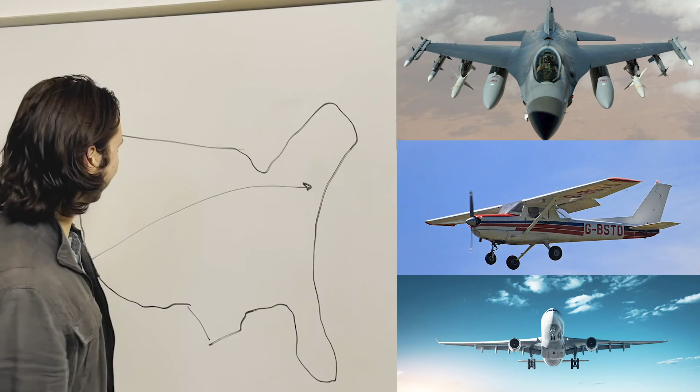So, what do aerospace engineers do? Well, they build rockets, they build satellites, rovers. One of their most phenomenal projects would be designing the airplane, which helps people travel really far distances, such as from LA to New York, across the entire US, fast. So now that we know what aerospace engineers make, let's look at how aerospace engineers think so that they can design planes, rockets, and all that good stuff.

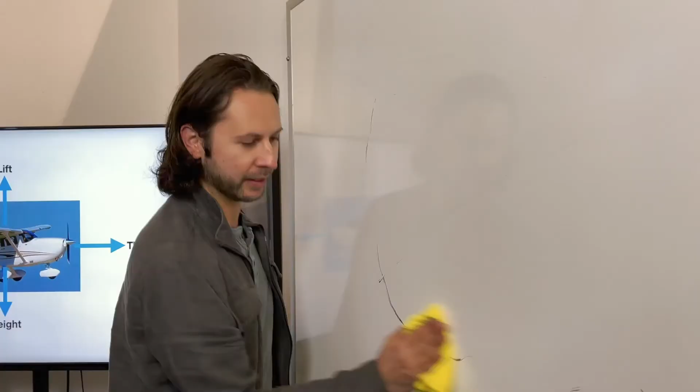As aerospace engineers make these planes, they have to keep in mind a lot of natural forces that they encounter when flying in the air. So we're gonna look into these forces, break them down together. There's 4 main forces that are acting on a plane at all times. The first force is one that we're all very familiar with, and that's gonna be the force from weight.

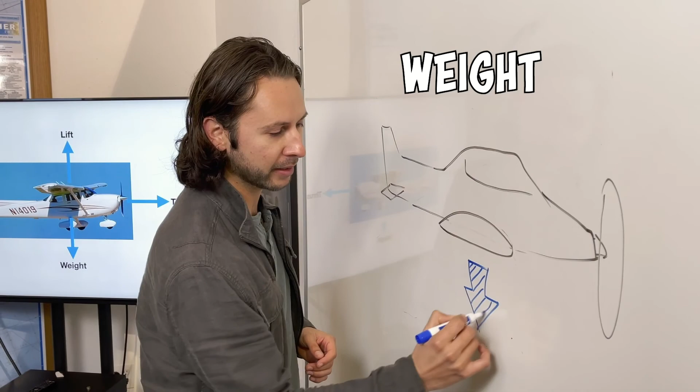Everything has weight. You have weight, I have weight, everything that we see has weight. And so what weight does is it keeps us on the ground. Weight also acts on airplanes.

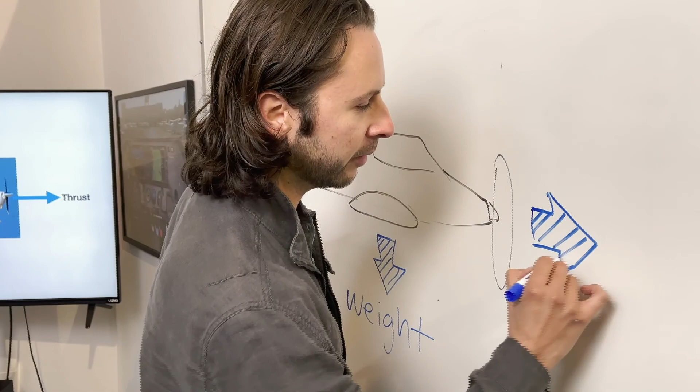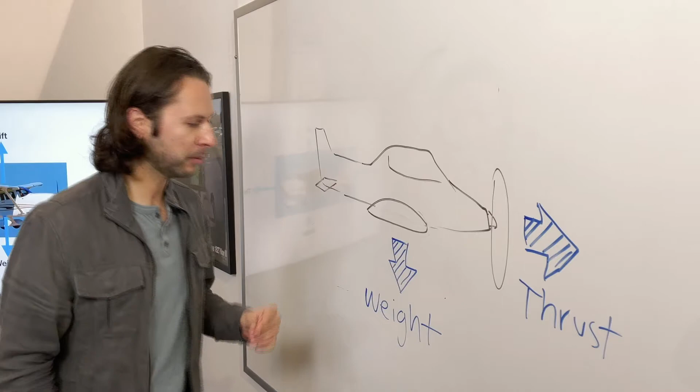Let's go into our second force, and that's going to be thrust. Thrust is what drives our plane forward, and it comes from our engine, our source of energy and motion. One thing to keep in mind is weight always exists, whereas with thrust, we have to actually apply energy and effort to get the plane to move forward.

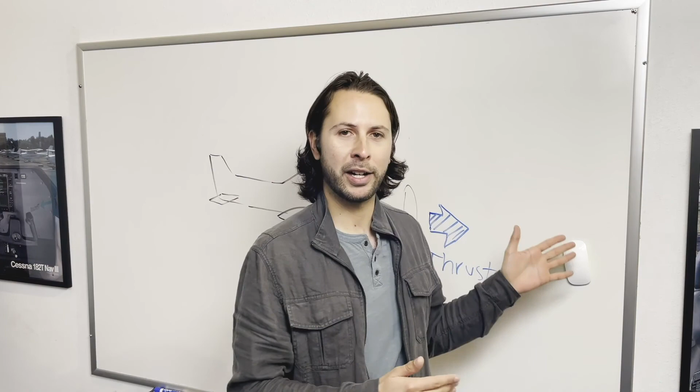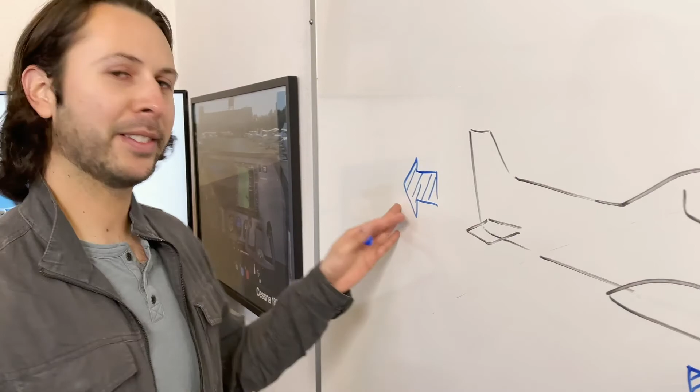Let's look at our third force, drag. Drag is something we're all very familiar with. For example, picture yourself in a moving car and you stick your hand out the window. You feel air resistance, which prevents your hand from going forward and actually pushes it back because it's resisting the motion of where you're trying to get to. If our motion is to the right, then our drag is going to be against that, going to the left. So drag exists back here. We're going to label that force.

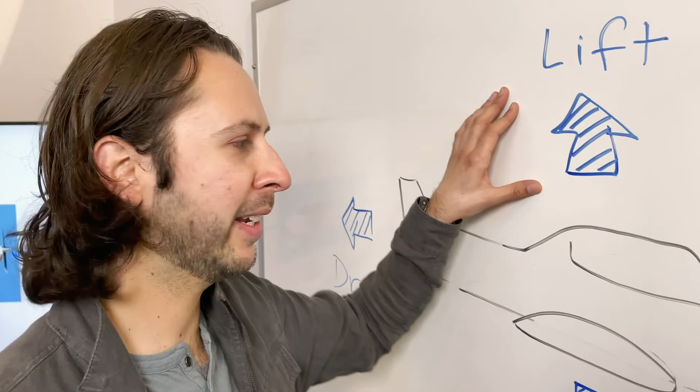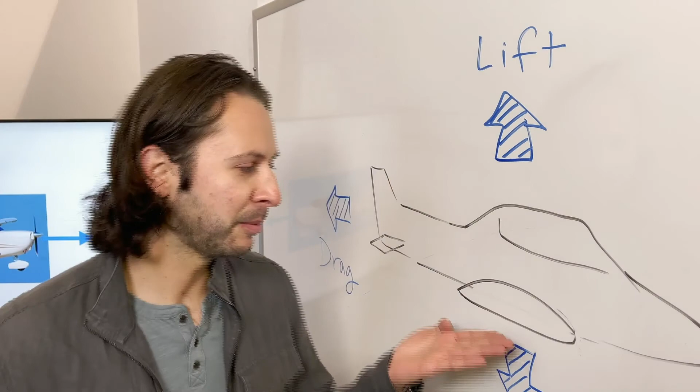For our fourth force, we're going to talk about lift. Lift is our fourth and final force, and it acts to get the plane off the ground. So ask yourself, what do all planes have in common? All planes have wings, and wings are shaped in a very specific way so that when the plane is moving at the right speed, they create lift.

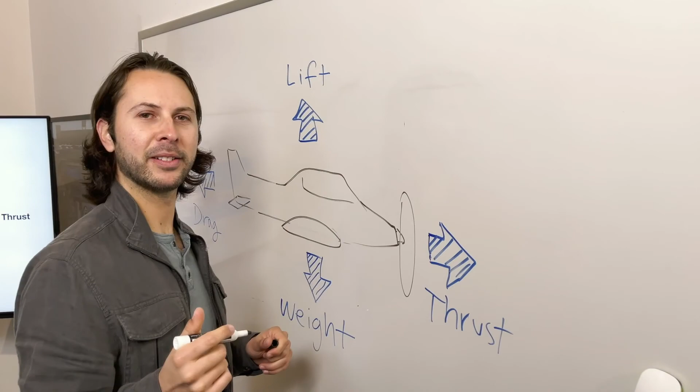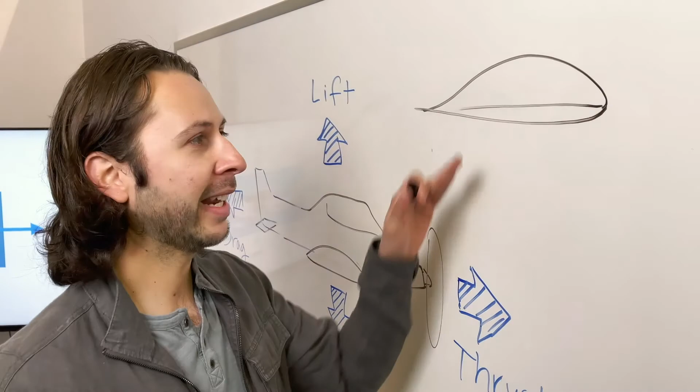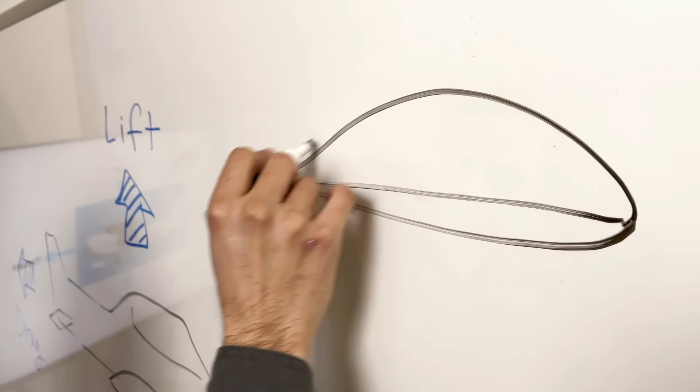Let's draw the basic shape of a wing. Looking at it from the side, we're going to draw the side of the wing, and this shape has a specific name — it's called an airfoil. If you draw a line down the middle, you'll notice that the top of the wing is a little bit more round, and the bottom of the wing is a lot more flat. This is the specific shape that gets us off the ground.

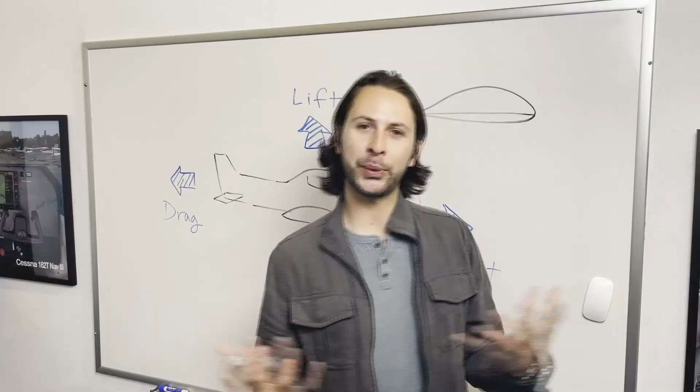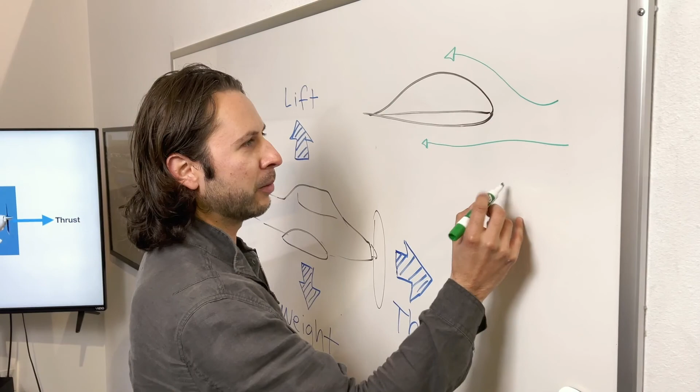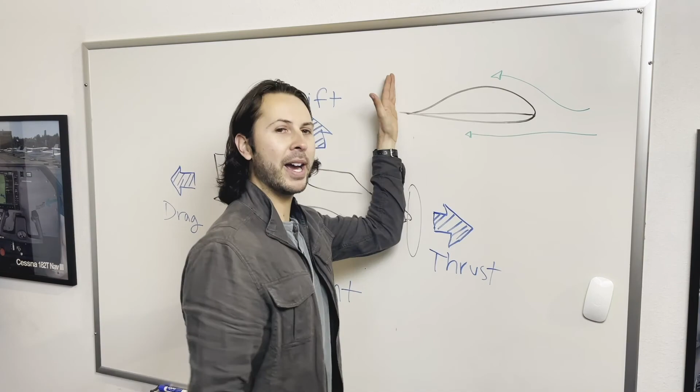Wings move through the air, so we have air passing above and underneath the wing — airflow above and underneath the wing. We have air molecules at the front of the wing that are traveling together, and they need to travel above and underneath the wing and meet at the back of the wing together as well. This happens by having the air molecules travel above the wing faster than underneath the wing.

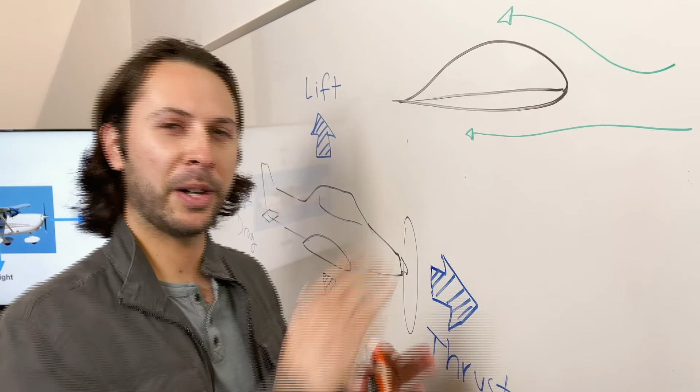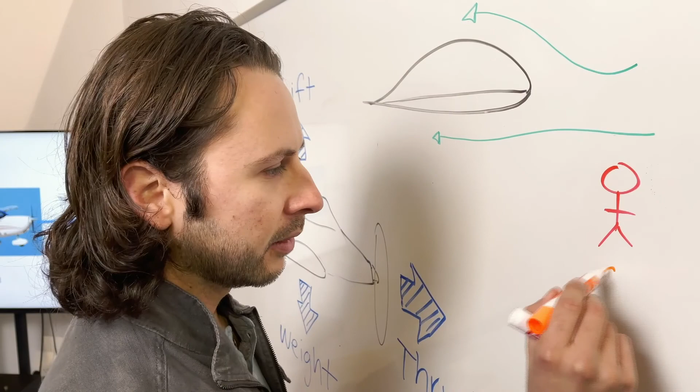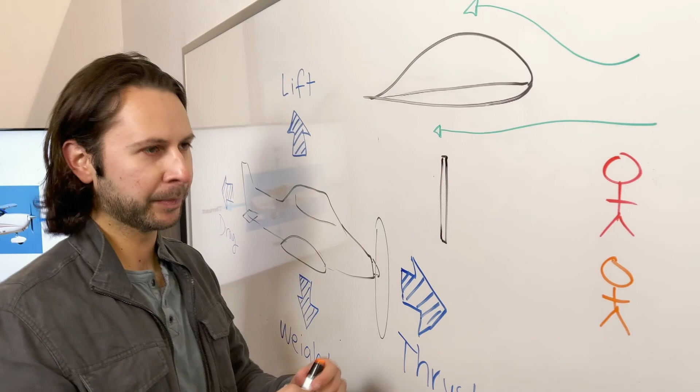To understand airflow underneath and above the wing, let's use a real-life example. Let's say you and your friend are running a race. This is you, and this is your friend. You're both running a race, you start at the same time, and you want to get to the finish line at the same time. But let's say your path to the finish line is different — it's a lot more curvy and a little bit longer than your friend's path, which is just a straight line.

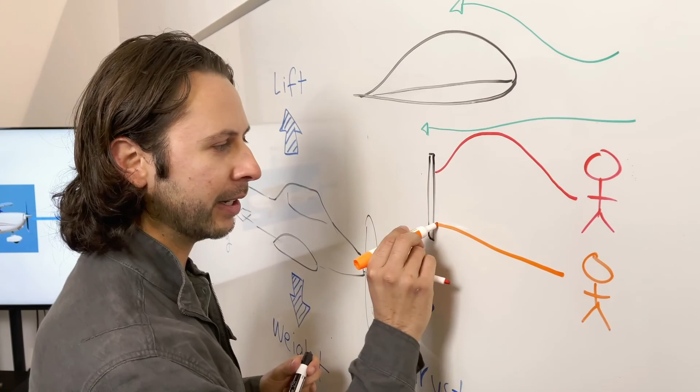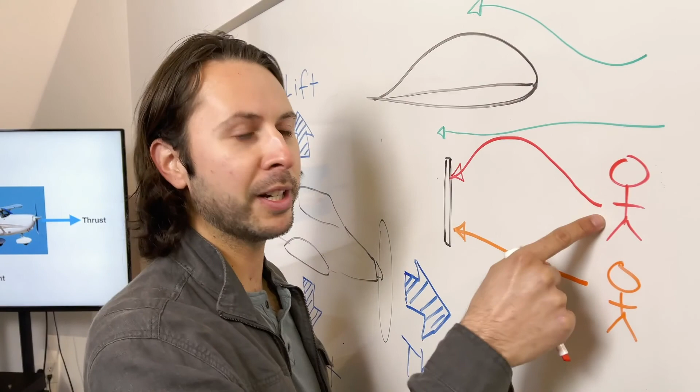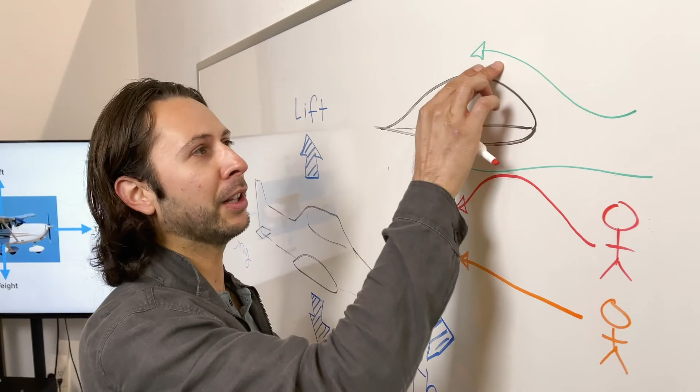If you're running the race together, you start at the same place and want to end at the same place together. But if your path is curvy and longer, for you to start and end at the same time, you're going to have to run a lot faster to catch up with your friend just running in a straight line. Since you're moving faster here, our air molecules up here are going to move a lot faster so that they can start and end at the same time.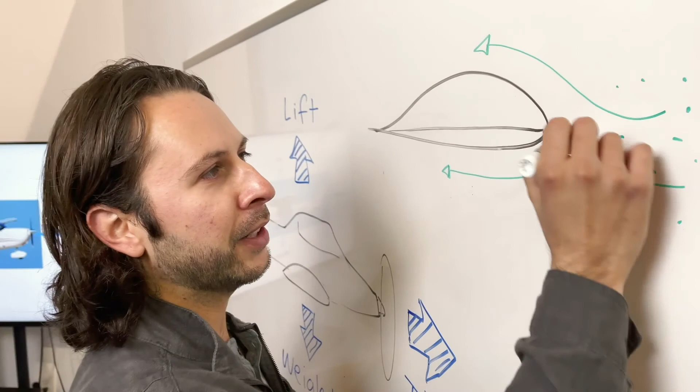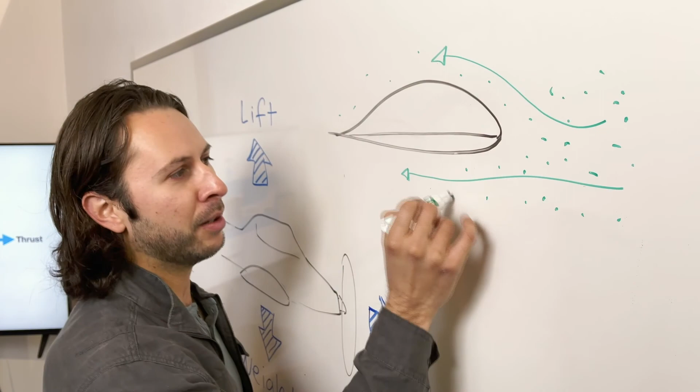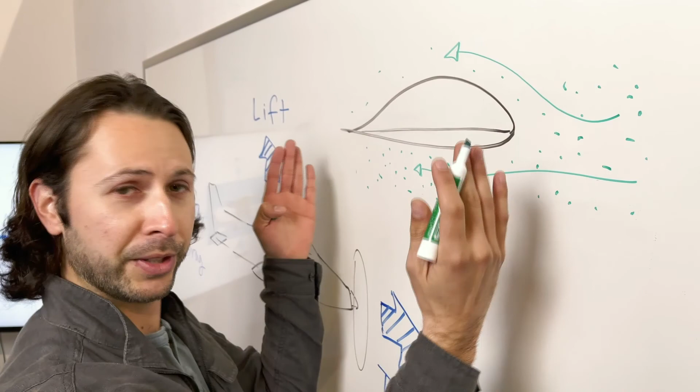So you have air molecules at the front of the wing. If your air molecules are going over the wing and moving a lot faster, you're going to have air molecules here, whereas the air molecules underneath the wing are going to be moving slower. Therefore, you're going to have a more densely compacted count of air molecules underneath the wing than above. Since our air molecules on top are moving faster, they're spread out thinner and there's fewer.

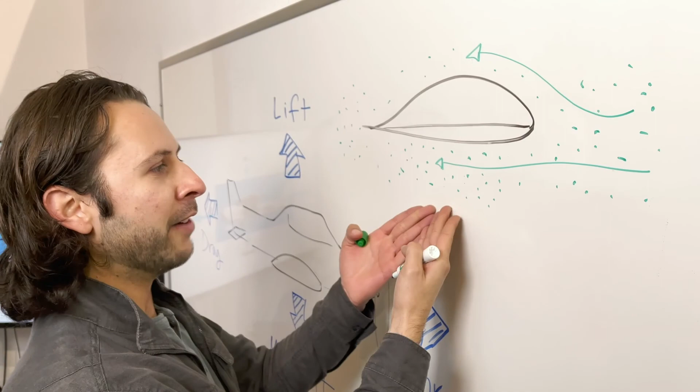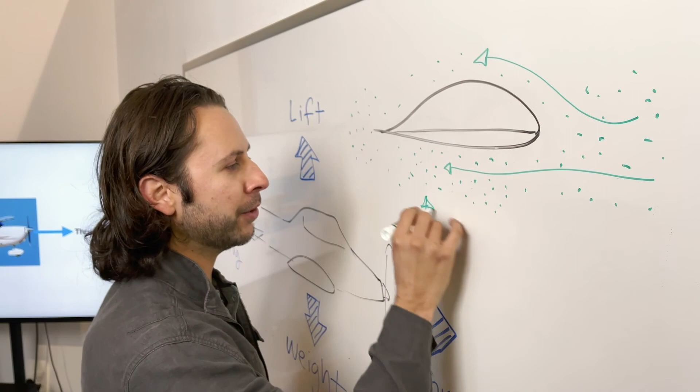Because we have more air molecules underneath the wing, we actually have a pressure difference from underneath the wing to the top of the wing. Because of this pressure difference, we have a lot more pressure underneath than on top, causing our wing to experience lift.

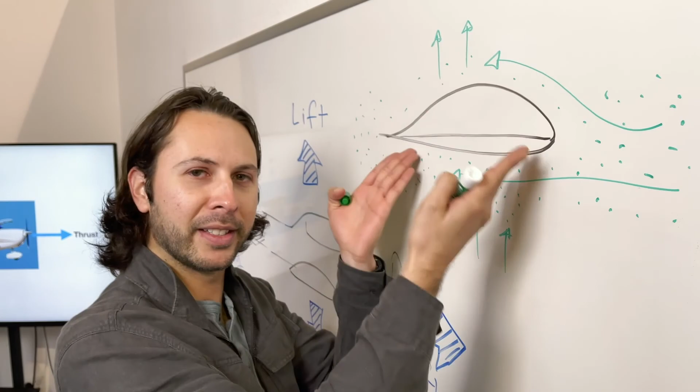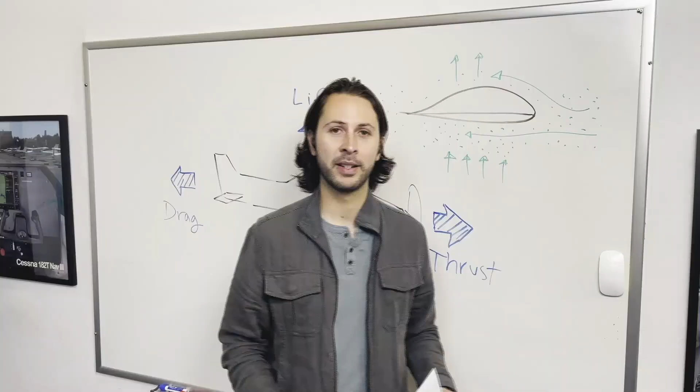All right, so now that we are familiar with our four forces, let's take a look at how they work together and how they interact. So we have our lift, thrust, weight, and drag.

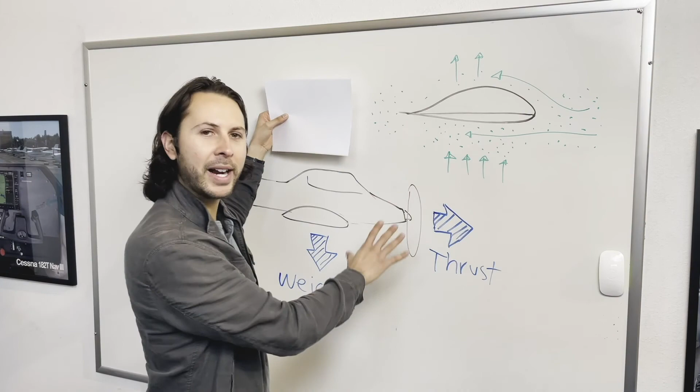Let's see what happens if we take away lift. What do you think is going to happen when there's no more lift on the plane? If we remove lift, we're going to have drag, weight, and thrust still acting on the plane. But without lift, the plane is actually going to start dropping.

Here we are in Torrance, California at the airport. We're going to show you the controls on the whiteboard, but also inside of a plane, so we can show you how pilots use these controls to maneuver the plane and have it go wherever they need it to go.

All right, so we have our different control surfaces on a plane. We have our ailerons, our flaps, our elevators, and the rudder. So let's see what happens as we change all of these around. The first surface we're going to go over are the ailerons, located on the outside of the wing.

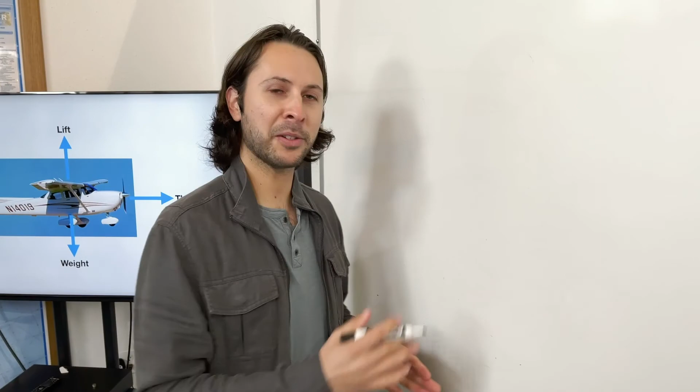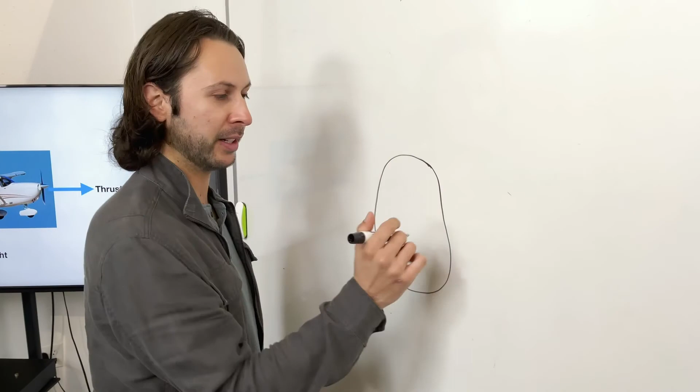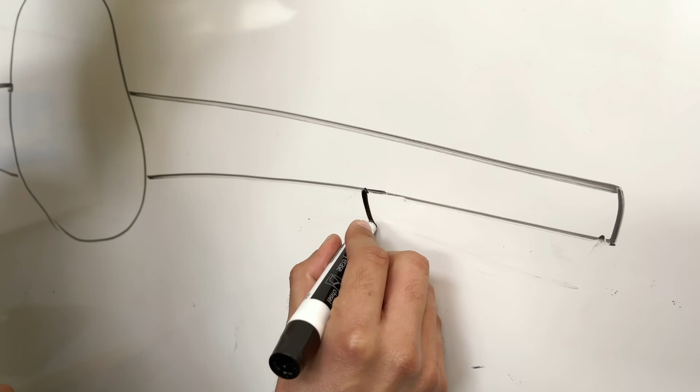Our ailerons are actually used to turn the plane. And you're probably wondering how. Well, let's get into this together. Here we're going to draw the plane as we're looking from the front. Here we have our plane. And our ailerons are used to turn, and so they go down and up in opposite directions.

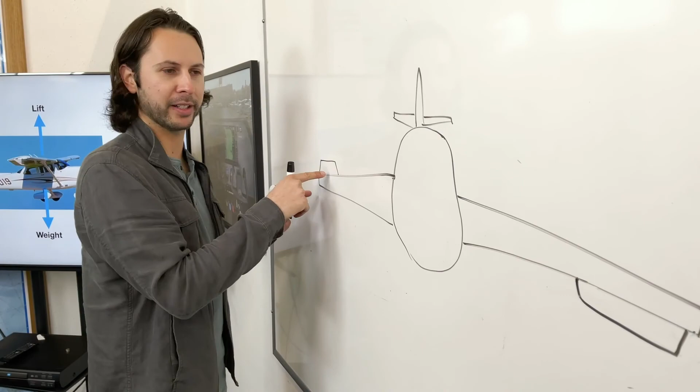So if we have our aileron over here go down, we're going to have our aileron go up over here. We have the aileron going down, and it's going to change the surface of our wing. And we see how the wing shape really affects our lift.

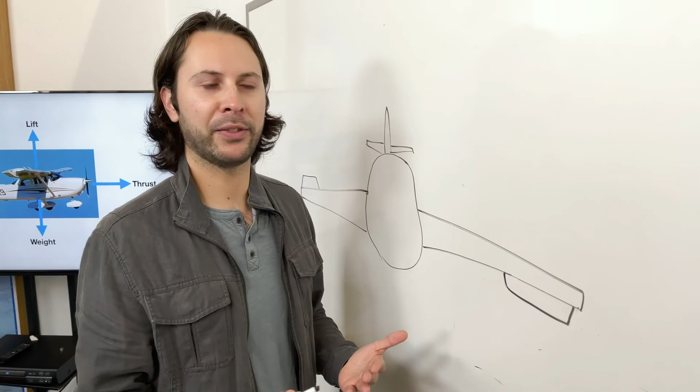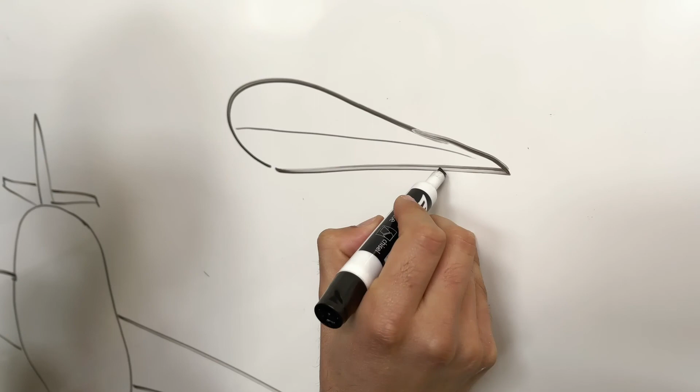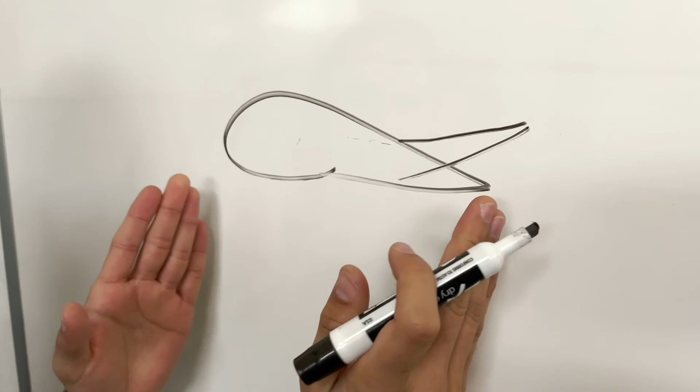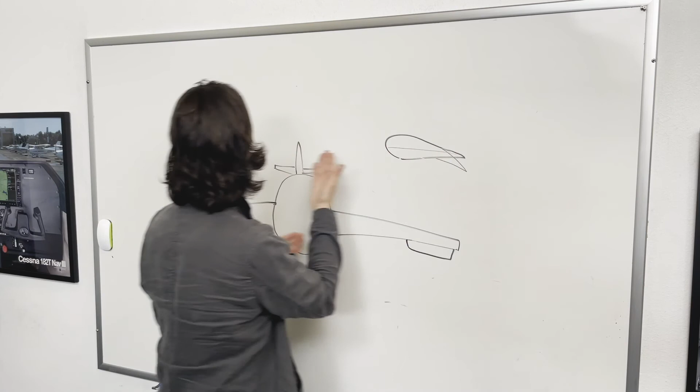So if we have our aileron down here, we have the side of our wing looking like this - we have the airfoil. If we have our aileron going down, we can notice that the shape of the wing has changed, making the wing a lot longer. Whereas in this case, if we have the aileron going up, we have a different shape - it actually makes our wing a little bit shorter. Based on how these are drawn, the shape of the wing is different: the aileron is down in this case, and the aileron is up in this case.

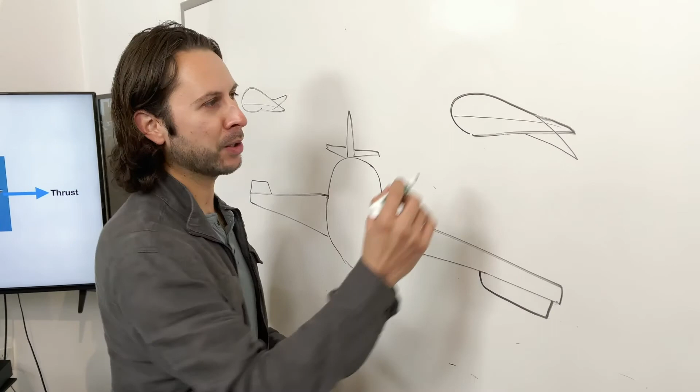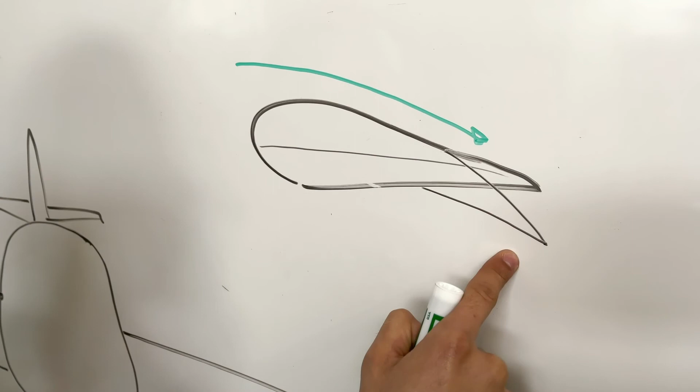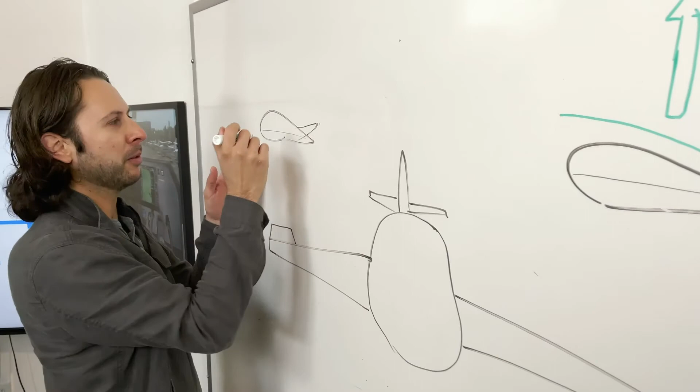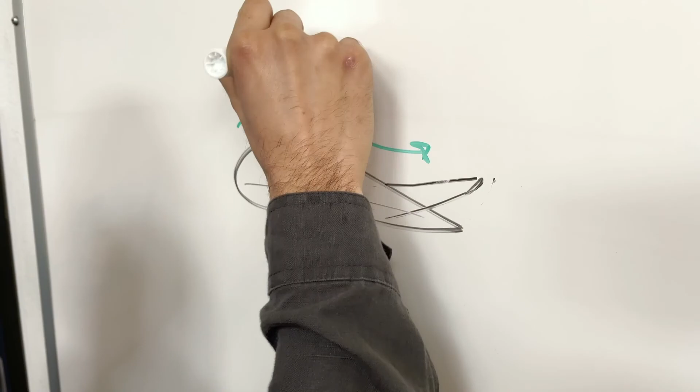And because we have a different shape on both sides of the plane, our lift is going to be different. Because we have airflow moving down this wing, going down a longer top of the wing, we're going to have more lift in this case compared to this side of the wing, where the travel distance of these air molecules is a lot less. We're still going to have lift, but it's going to be a lot less. And because of that, this wing is going to want to move up more so than this wing.

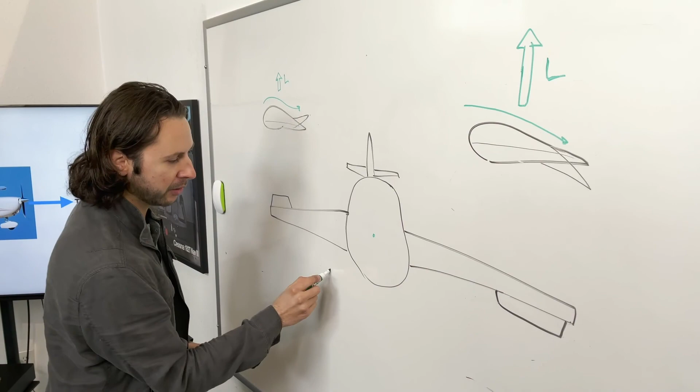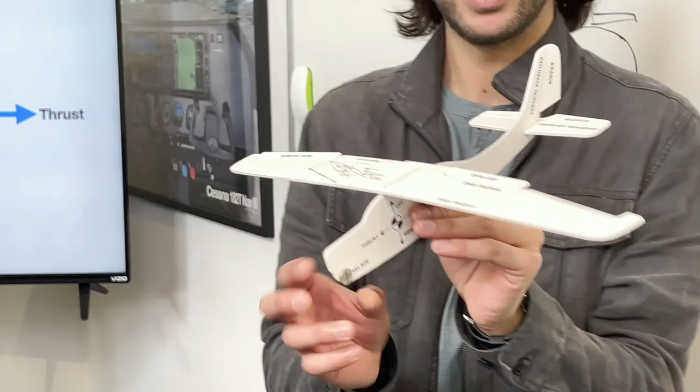And what ends up happening is we're going to have a roll in this direction. Let me show you what that looks like on a plane as it's moving through the air. So we have this aileron here down and this one up. As we have these in opposite directions, we're going to have the roll of the plane. And as it's moving forward, it's going to want to turn - it's going to turn this way.

Come on in and join me inside of a plane. The first control surface we're going to look into is controlling the ailerons, which we control with the yoke, very similar to the steering wheel of a car. We're going to use this to turn the ailerons on the plane. So if you turn left on the yoke, you'll make the plane turn left, just like turning a car to the left. You turn the yoke to the right, and you'll turn the plane to the right. So now, if you take a look outside of the plane, you'll see how the ailerons are moving in opposite directions. Let's take a look.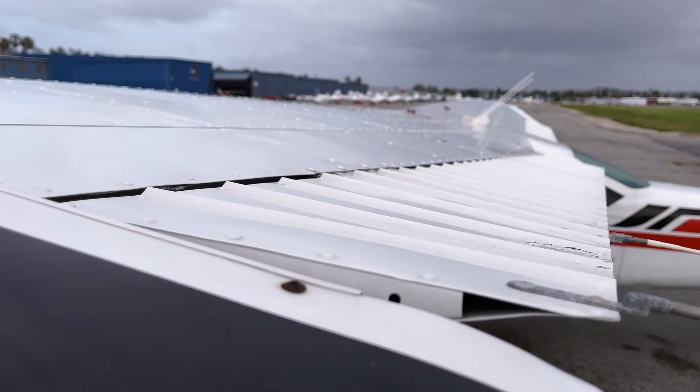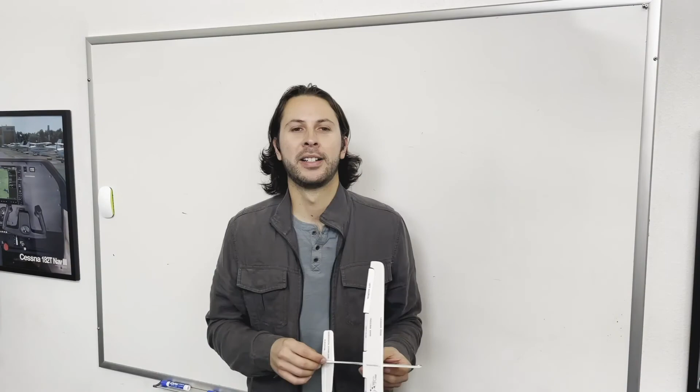All right, so now let's look at our next control surface on our plane. We're going to look at the flaps, which are located closer to the inside of the wing. A big difference between the flaps and the ailerons is the flaps go up and down together. They move the same way, never in alternate directions like the ailerons. They only stay together. So you're probably wondering what the flaps do.

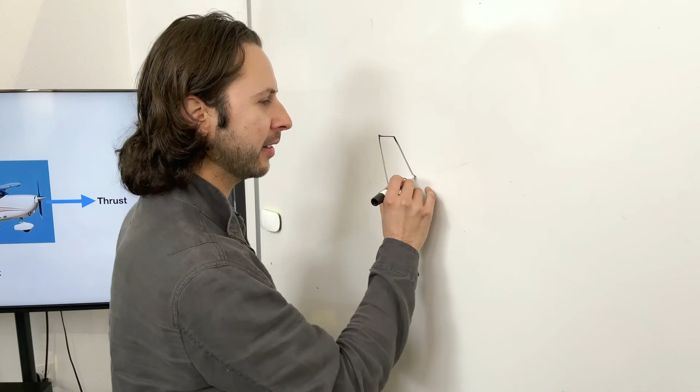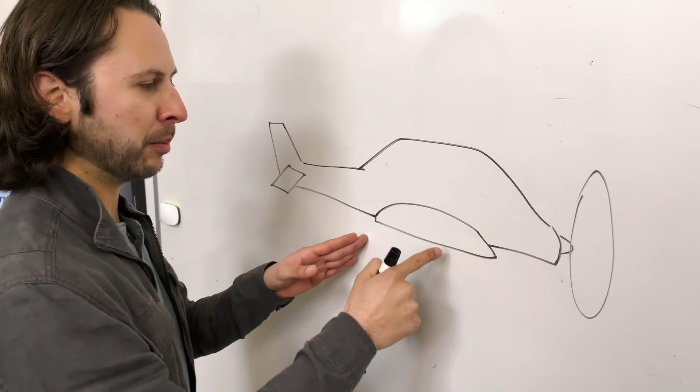Let's actually get into that on the whiteboard. Like we described before, the shape of the wing really affects the flight of the plane. So let's see what the flaps do and how it affects our flight. Here we have our plane, looking at it from the side. What ends up happening with the flaps is they really extend the length of the wing.

So flaps exist for two main reasons. They actually slow us down, but they also provide lift. Now let's see why that happens.

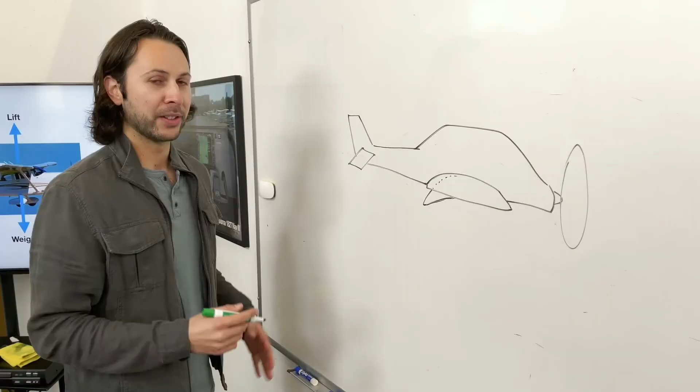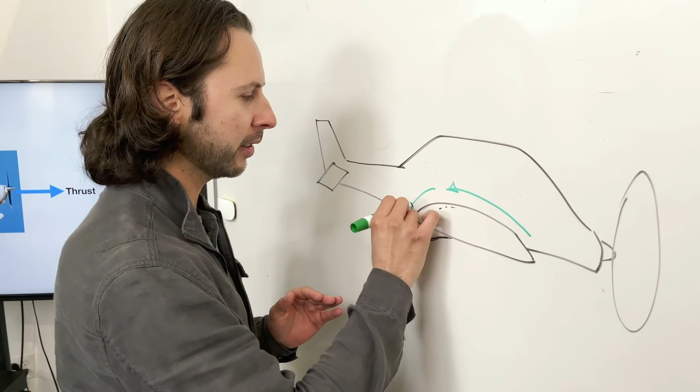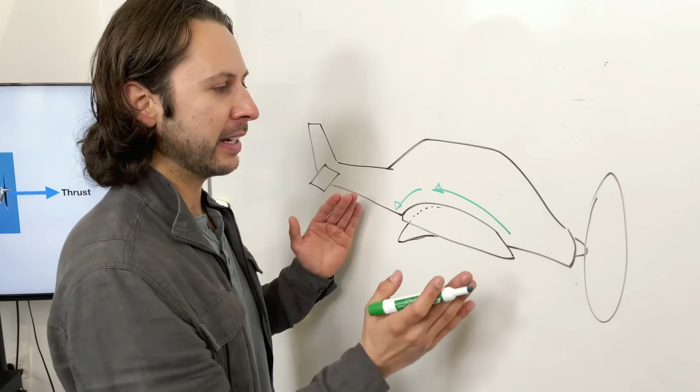The flaps, as they go down, increase the length on top of the wing. And if we increase the length of the wing on top, as we saw earlier, we get a lot more lift from the wing because our surface on top is larger than our surface underneath. When we have that different distance that air molecules have to travel over, it creates a pressure difference which causes lift. So we have a greater lifting effect with our flaps down because our distance is greater up top, causing our lift to increase.

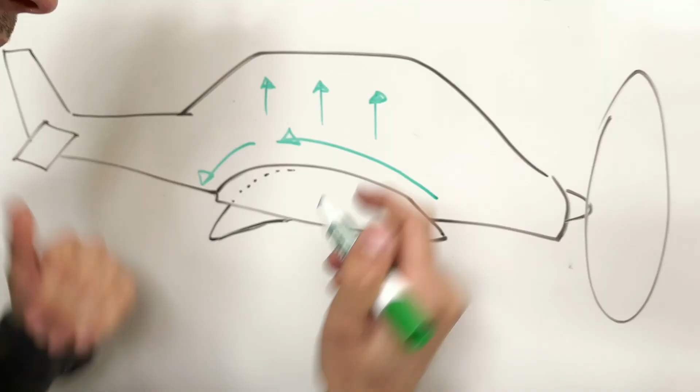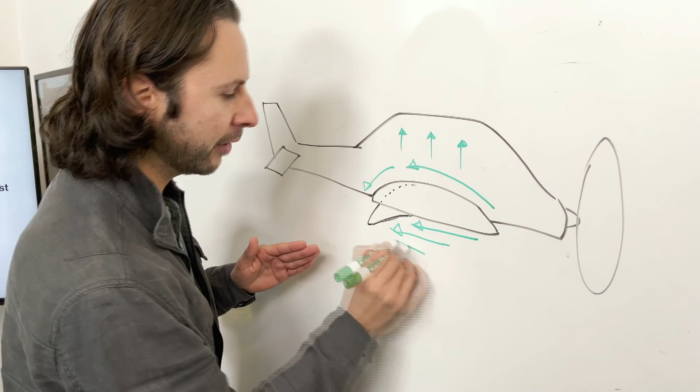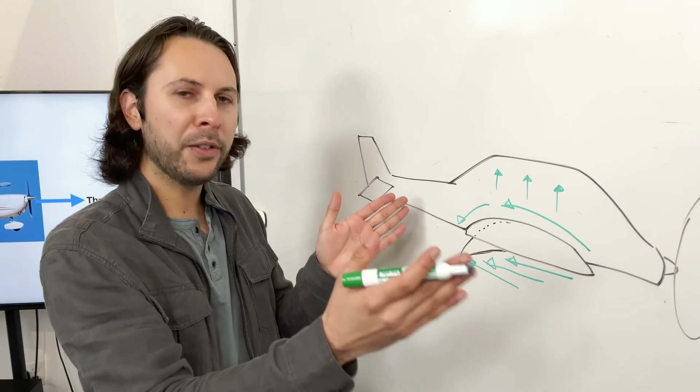But as we change the shape of the wing and bring it down, now we have a lot more drag from all of these air molecules crashing into the flaps. There is more surface for air to crash into. It's kind of like when you stick your hand out of a moving car, you can feel the resistance of all the air colliding with your hand and slowing it down. It's very similar to a wing.

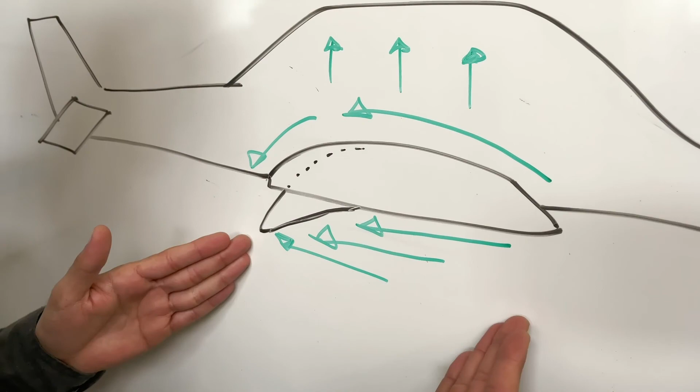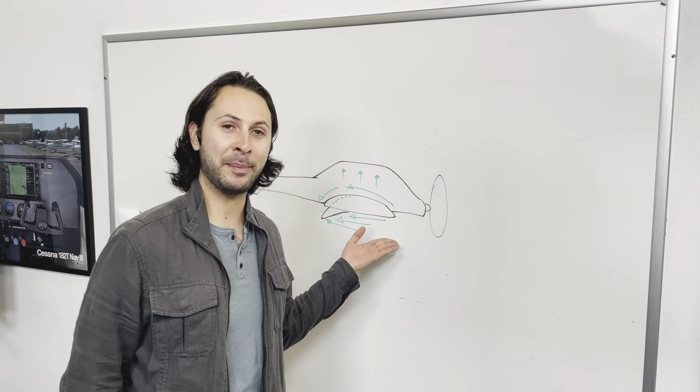So now that we have the flap down, we have a lot more air resistance. And when we have more air resistance, we are increasing our drag. It's actually slowing the plane down, having the flaps in a downward set. Now that we see what the flaps do, we have a lot of lift, but we have an increased amount of drag. So when is the ideal situation to have lift and drag together?

Well, pilots use flaps when they're landing. It's one of their biggest contributions to the plane design. As they're landing, you need to slow down, so you want to increase your drag, but you still want to have your plane off the ground so that you can land on the runway safely.

Now we're going to look at our next control surface, the flaps. We're going to flip the switch to bring them down.

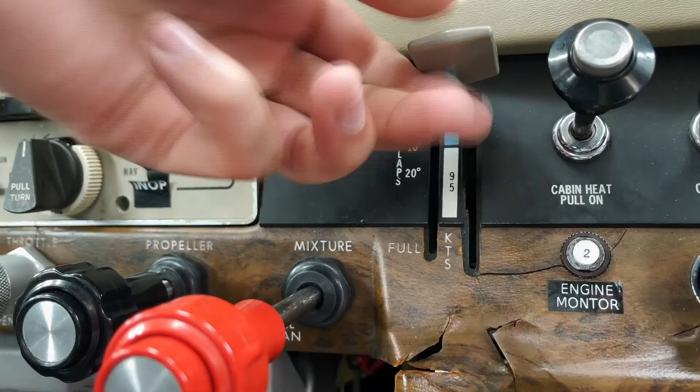So now that we looked at the ailerons and the flaps, we're now going to move to the back of the plane where we have our elevator and the rudder. First, we're going to go over the rudder.

Now, rudder moves side to side. Let's say we have the rudder facing this way. As our plane is flying, we're going to increase drag on this side of the plane, which ends up causing the plane to turn this way. If we turn the rudder over here, as we're flying, we're going to actually turn this way because we have an increased amount of drag on this side of the plane.

Pretty cool, right? It's really cool to control the rudder because we control it with our feet. Watch, take a look. When I push my foot to the left, it'll turn the rudder to the left, causing more air resistance and drag on the left side of the plane, which will turn the nose to the left. If I push with my right foot, it'll turn the rudder to the right, causing more air resistance and drag on the right side of the plane, causing the nose of the plane to turn right.

Lastly, we have our elevator. So if our plane is flying straight, changing the direction of our elevator will help the plane either go down or go up. That's called the pitch.